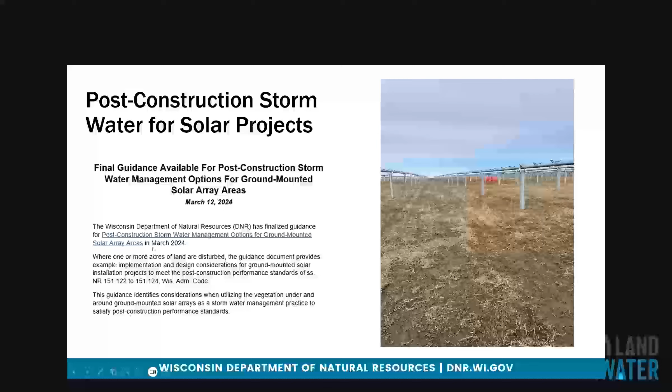Right now, the one that just fairly recently was put out for public comment and should be available shortly, Eric Rortfett is working on this one, is our post-construction modeling guidance.

This is the guidance that mostly is appropriate for people that are getting construction site stormwater permits, putting together stormwater plans. There are questions that come up that aren't answered by either the code or the permit or our technical standards, so that's why this guidance is really important. I use it quite a bit for plan review. Anybody who's submitting NOIs should keep up on this guidance because it guides how you, in particular, calculate things like TSS control and infiltration.

So there was an update that Eric did fairly recently. It covered some changes to WinSLAMM regarding biofiltration, also a section on filter strips. We don't have a tech standard for filter strips yet, but quite a few comments come up and people are trying to use it in WinSLAMM to take credit, but that raises some other questions without a tech standard. So there are some new elements regarding filter strips and a few other things.

So it was due for an update. It was probably about 4 years old. This is a guidance document that we do update quite frequently, so it should be available fairly soon when Eric gets through all the comments. So that's it for guidance documents. We have several tech standards that are in the works, and I think I talked about this last year too, suggesting that they would be available already by now, but we're getting closer.

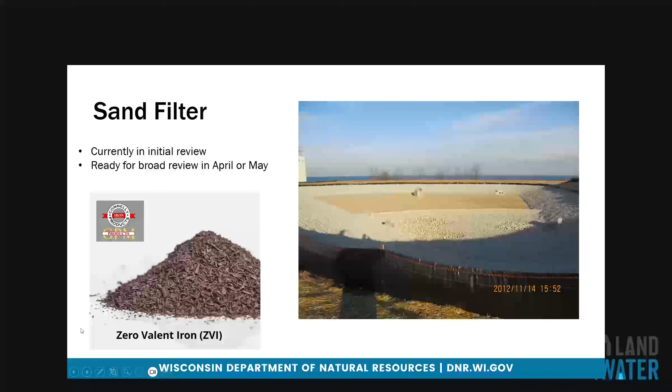It's added in at a pretty low percentage to the sand. It could actually be added in the traditional engineered soil mix also. It's usually 3 to 4% of the total mix. But it's showing a lot of promise, even with a mixture that has compost and sand, at controlling phosphorus. So we'll probably see a lot more of this. It could be used today in Wisconsin, but any other iron products would have to go through the same procedure for toxicity testing.

There's another tech standard, the enhanced phosphorus removal tech standard. I think Leif's involved in this one. It was actually a single tech standard. Apparently now it's been divided into two. And this is primarily for wet detention ponds and chemical addition to cause additional phosphorus removal.

So one's the flow weighted option. So this would be similar to application of a coagulant in water or wastewater treatment, where it would be added during a storm event, proportional to the flow. And then the other option is episodic. So this would be basically like dosing a pond when there isn't a storm event occurring. And so the tech standards are developing procedures for how these chemical additions should occur in those two applications.

So we'll see. This is probably more of an MS4 application, I'm thinking. Leif may have some more input on that, but that would be my thought. I can't imagine developers using basically a permanent chemical installation technique, but we'll see how that plays out. So that's where we're at for our technical standard updates.

Now I'm going to spend at least some time on some of the stuff we're working on in the MS4 permit world. So some really interesting stuff, and we'll see where it plays out. The first thing I want to talk about is something I've been involved with for the last year. This was a joint effort between DNR and MMSD to talk about urban soil health. So I think it's not a surprise that soils in urban areas are in pretty bad shape from either historic fill, compaction, poor vegetation quality.

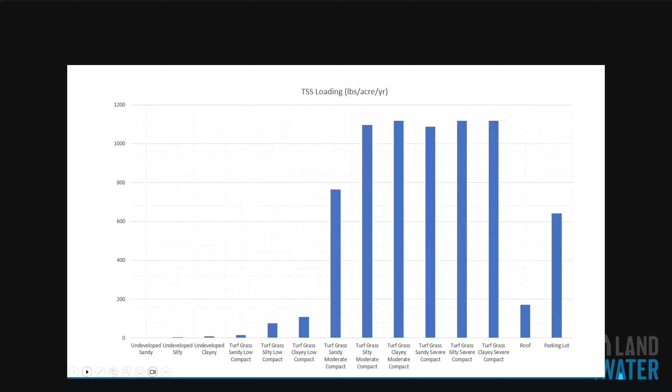This may not be the answer for everyone, but I think a lot of municipalities may have some pervious areas where some sort of practices could be implemented that could result in significant reductions in discharges. So that's the idea. And one of the concepts out there in the world is suburban subsoiling. We had an expert, Stu Schwartz from the University of Maryland, Baltimore County, who provided a lot of the technical assistance to this group on the techniques available. So suburban subsoiling is essentially applying 2 to 3 inches of compost to the surface and then deep tilling it to 20 to 24 inches, and then revegetating it, either with turf grass or with native vegetation.

And the interesting thing about working with Stu, he's very practical about this whole thing. He suggested this doesn't create a super soil. What it does is bring a soil back to its kind of optimum condition, prior to all the urbanization impacts we talked about. So this is one of the techniques that we talked about.

There's also some other techniques. This is just one of them. This would be more of something that you would possibly do on a residential site. It's essentially digging up the compacted soil and putting it back in a way that it's uncompacted. So if we have a future tech standard, it would lay out a number of different options.

There's different aeration techniques, in combination, let's say, with compost addition or sand, to try to bring that soil back in some way. So future tech standard, hopefully we're able to do that, and it would lay out some different options. And then also if we're able to monitor these practices, actually quantify their effectiveness, we could establish some kind of credit system, which I think would be of interest to MS4s.

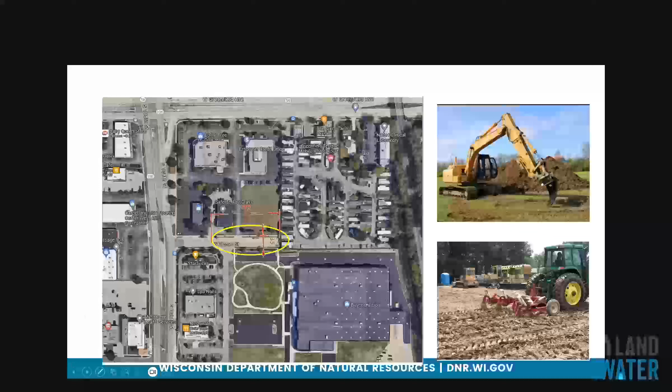Another project of interest to MS4s is one where we're lucky enough to get a student intern to help. We've been contemplating the issue of long-term maintenance agreements for private practices. This is part of the MS4 permit, especially if municipalities want to take credit for TMDL compliance using private practices. They need to have long-term maintenance authority and make sure these private practices are being maintained. And we just wanted to help in some way.

So what our intern is doing right now is getting a feel for what all the municipalities in Southeast Wisconsin are currently doing in this realm to manage, the most difficult thing in the world, especially ponds owned by homeowners associations. So we're doing a little background work, and we'll see what that tells us. We've also partnered with Sweetwater on this. First is just to establish what folks are doing, and then identify what the needs would be.

It's a difficult topic, from what are the best approaches legally, how do we help homeowner associations do this work, funding. It's a broad topic, and we've talked about it at this conference in the past too. So stay tuned on that. Ultimately we may develop some sort of guidance to help municipalities deal with this. But part of it is learning what everyone's doing and seeing how we can make improvements. We're going to need some help. We'd like to make some progress, hopefully, in this area.

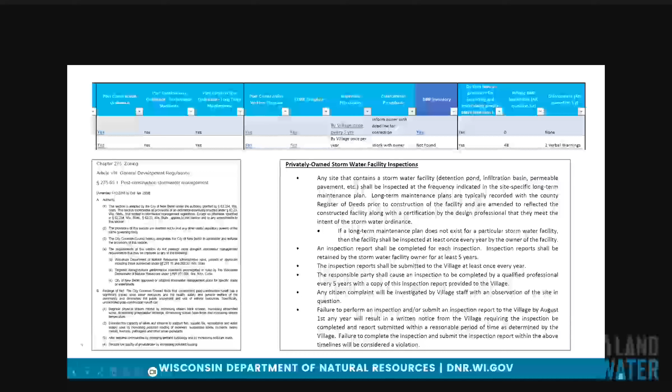Finally, okay, not finally, but another effort that you'll hear about: Lexi Pasante. I think some of you have heard from Lexi. She's one of our MS4 lead folks. She has started a project called the MS4 BMP menu. So what ultimately this is going to be is a DNR website application where we're going to provide examples for everyone of different practices that can be done to meet your permit, right?

So different programs and practices, all in one place on a special website. That's under development right now. Hopefully it should be available this year. But this is for the MS4s to have resources you can go to if you're struggling to, say, develop an illicit discharge program or something like that, right? Or how you regulate erosion control on construction sites.

So this is what we're doing right now. It'll be a website application. It'll have all kinds of resources, fact sheets, and other things. So it's a pretty significant effort, but having it done by the end of the year is what Lexi would like to see. So stay tuned on that. Should be a real great improvement for resources at least.

And then finally, just to give you a general idea of how MS4 TMDL compliance is going. I call it implementation trends. Most of the communities in the Milwaukee area that are under TMDLs are doing some activity in this realm, right? So I just want to list what we're seeing folks trying to do. I got a lot of this information from Lexi.

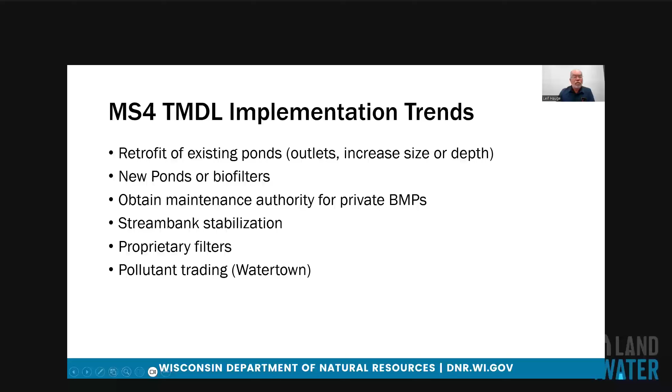Great, thanks. I'm not seeing any chat questions, but I wrote down some of my own that I'd like to share. All right. You're always good for those. For the solar projects, since the vegetation is essentially a BMP and it's presumably being required by whatever community to fulfill ordinance requirements, does that then entail a maintenance agreement?

Leif, I should know more about this, but I don't. Yeah, I mean, I think that would be logical, right? That if a BMP is suggested in a plan, it makes sense that there would have to be some kind of maintenance. So I'm going to lean towards yes, but I haven't looked at the tech standard closely enough to give you a definitive answer.

But it makes sense to me that any practice being used to meet permit requirements should have some sort of maintenance plan. And that would include any kind of vegetated area, because obviously, if for some reason it would start eroding or vegetation would die off, that would be an issue that would need to be corrected, right? So it makes sense to me that it would have to be incorporated into a maintenance plan.

A couple questions from the audience here. For urban soil health, any feel for soils best to try? That is a great question because again, we lean heavily on Stu Schwartz for this information. He did provide a table that showed that yes, there are soil conditions that are, I guess, more effective than others, where you would get a better result.

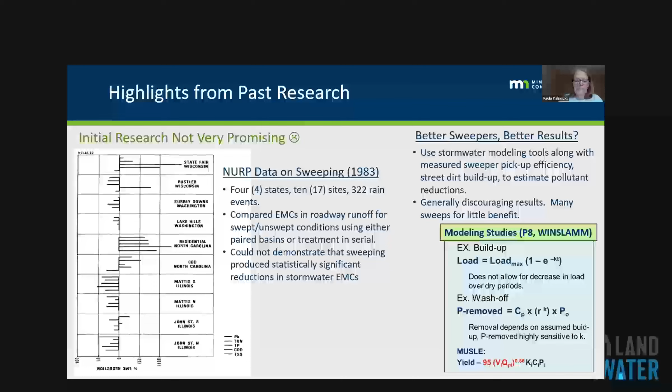And unfortunately, these studies still didn't have a lot of promise. It just seems to take a lot of sweeping to get much benefit. But some other studies showed some promise here for street sweeping. There's one from 1999, Waschbusch, Selbig, and Bannerman from Wisconsin, looking at runoff from different source areas in residential neighborhoods. And they found that there was a correlation between the overstreet tree canopy cover density and the concentration of phosphorus.

So this was not a street sweeping study per se, but they did also look at the sediment on the street and found that where you have higher tree canopy density, you also have more nutrients in the sediments that collect on the street. And a couple of these researchers then went further in 2007 in Madison, and did a very meticulous street sweeping study where they used paired catchments, or actually serial treatment.

So they would have a year where they weren't sweeping, and it was a calibration period. And then they would sweep and see whether there was a reduction in the stormwater EMCs that were measured downstream. Unfortunately, they also could not find a statistically significant reduction in stormwater EMCs.

But again, this was a very meticulous study, and because its methods were so well laid out, it was easier to identify what they might be overlooking. And William Selbig, the first researcher listed here, has continued to work on these problems, and the biases in traditional stormwater sampling methods.

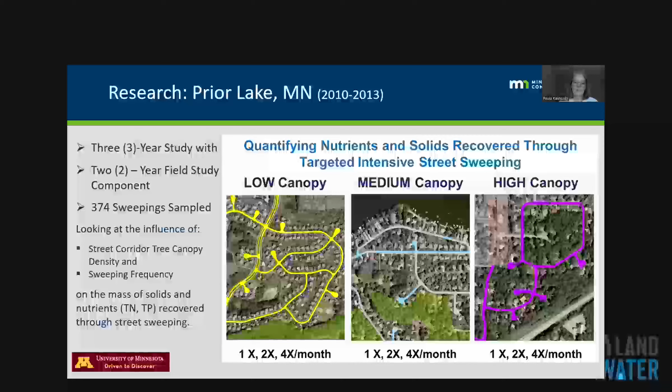And then the sweeping frequency. So for each of these canopy cover types, we had a route that was swept once per month, one that was swept every other week, and one that was swept weekly. And then we sampled the sweeper waste, and we got a representative sample from each of those sweepings, which totaled 374, and tested that material for its nutrient content and its total dry solids, not really any of the metals or toxins, but really just focusing on this nutrient piece.

And to do that, they had a unique lab method, a fractionation scheme that's a little different than what you might think of when you think of sediment fractionation. We usually think about that NURP particle size distribution, or just a particle size distribution into clay, silt, sand, fine sand, coarse sand. But we had to use a density separation to separate this organic matter that would float.

So the material was sieved, and then what remained on the 2 mm sieve was washed and then separated. We had to sample that wash water to account for nutrients that had leached. And what we called fines in this study was anything that was less than 2 mm. So that's kind of a different terminology than what we might be used to associating with the word fines.

So that was a very quick look at the setup, but we're going to go through a really quick look at some of the findings. So some of the key findings here: the things that were measured were the total solids that were collected, and then those nutrient components.

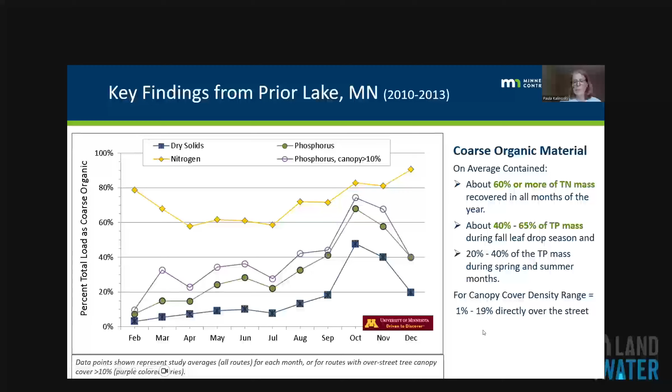They were able to compost anything with a lot of leaves, and they reused a fair amount of their material for fill. They were developing at the time. So that's a cost that sometimes is much bigger for some of the cities. But the big finding was it can be very cost effective, especially that high canopy at particular times of the year.

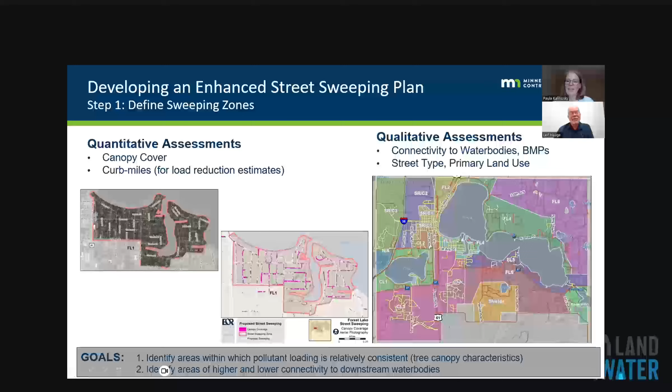So we had to look at the canopy density over the streets and the drainage characteristics, where they have BMPs, and kind of develop these zones where there's those factors that I talked about earlier: high connectivity and high street canopy.

And once we had identified these zones that had that relative homogeneity, we used my calculator to estimate, okay, how much can we recover from the street by sweeping just spring and fall, by adding another sweep, by sweeping monthly, etc. And then we thought, well, what you recover from the street isn't the same as a load reduction to a water body. So this is a big simplification probably, but still maybe as best you can do.

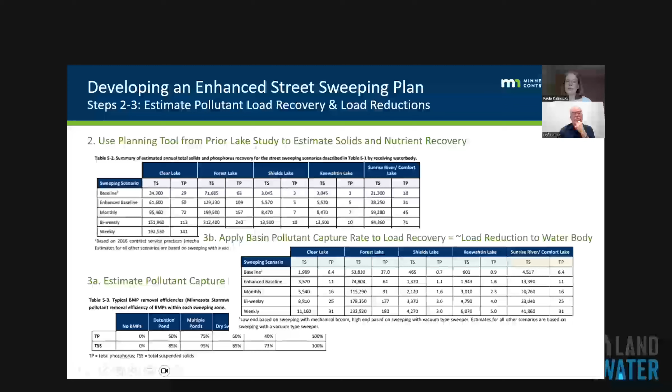We estimated what percent of that material the BMPs within each basin would capture, what's the capture efficiency of those BMPs, and then we applied that to these load recoveries to get an estimation of the load reduction to water bodies.

And we did an estimate of the costs for developing an in-house program following what the engineer had done in Prior Lake and talking to the city engineer there, and found that this city could actually save money by developing an in-house program. They had previously been using a contract service. Anyway, I'll just go on.

But all of this work prompted the MPCA, where I work now, to develop a street sweeping credit for MS4s. There's a calculator that they've developed so that MS4s can determine, based on the amount of sweeping that they've done and the material weights they have to get, what credit they can get towards their waste load allocations.

This crediting calculator was produced using some additional sweeping data from five other communities in the metropolitan area, and an additional 175 sweepings, including some from the Forest Lake area, because they caught wind of this effort and said, hey, we're implementing our street sweeping plan, and we could send you some samples to use to calibrate your tool. And that was great for us because we could check our assumptions.

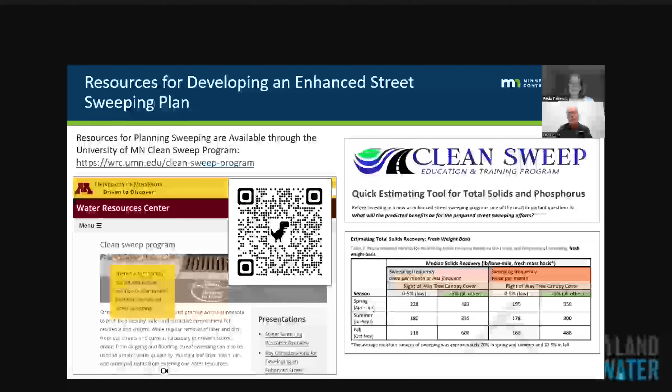The University of Minnesota has built on this research to develop a Clean Sweep program. So they have tools that help you to estimate your recovery based on canopy and these other things that we've discussed. You'll find another QR code, including ways to estimate tree canopy too. There are tools for that.

So there's help out there, and I'll just say in Wisconsin, Bill Selbig has continued to do a lot of research in this area, and it's really interesting stuff. Another QR code, you should read his articles.

And I'm also an alum of the University of Wisconsin-Madison, so can't overlook that.

All right, I'm sure I'm over, but I'll take questions. No, you're doing great, actually. What's that?

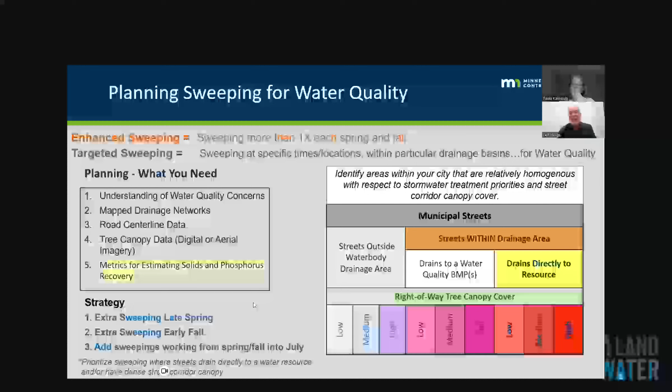That's very interesting. In retrospect, do you have any idea why those earlier studies were statistically inconclusive based on your experience with this study and application? Yeah, well, a big part of it, if you look at Bill's work on the integrated sampling depth, a lot of it has to do with that.

There's two things. If you're just looking at one point within the storm sewer, if you're pulling water from there, you're going to miss some material. You're going to miss heavy material that settles out before it reaches the sampling intake, and you're also going to miss anything that floats or is just too large to get in there.

And then the other thing, so that's one factor, but the other thing is that oftentimes this organic material was just kind of overlooked, separated out, and not really analyzed. And there was a focus more on toxins, I think, in those earlier studies. And that's not surprising. That's closer to the Clean Water Act and rivers being on fire and everything.

There was a focus on nutrients and eutrophication, but I think that's a greater focus for us now because we've eliminated a number of things through our NPDES permit. And we really can hone in on what we haven't been able to solve so far. Yeah. Here's a question from the audience.

Did you do any correlation to what WinSLAMM modeling predicted versus the spreadsheet calculations you prepared? I haven't done that, but here's the thing with P8 and WinSLAMM. I don't know if WinSLAMM has since added any functionality, but WinSLAMM I think was calibrated from that 2007 study.

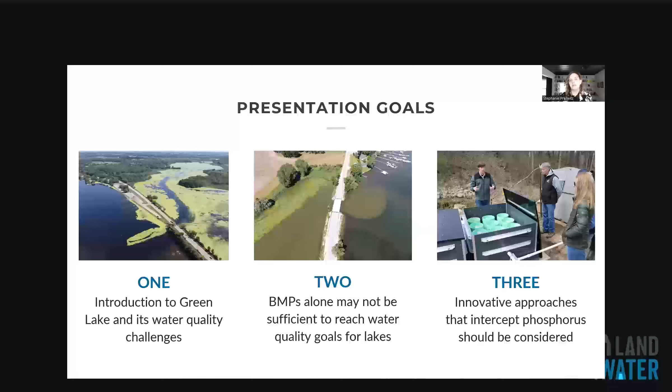So my presentation, I'll touch on three topics. One is I'm going to be talking a lot about Green Lake, so I'll talk to you about the lake itself, its water quality challenges. I want to talk about how when it comes to the really substantial phosphorus reductions that many of us who are lake managers are facing, best management practices alone may not be sufficient. And I want to tell you a little bit about some of the innovative approaches that we're testing and looking into. So welcome to Green Lake.

Green Lake's claim to fame is that it's the deepest natural inland lake in Wisconsin. Its depth is 236 feet deep, an average depth of 100 feet. And because of that great depth, Green Lake stratifies into a two-story fishery. So warm water on top, cold water on the bottom. And that great depth is a very strict water quality criteria, so 15 micrograms per liter. The lake is 7,660 acres.

The latest calculation of the retention time is that it's about 15 years. I think it's so interesting to compare that to Lake Winnebago, for example. I believe I read somewhere that its retention time is closer to 6 months. So really lots of water flowing in at a slow rate leads to a long retention time. This lake is a glacial lake, so formed during the last ice age. Green Lake's watershed is within the Upper Fox Wolf watershed. And so for that reason, we are part of the Upper Fox Wolf TMDL. But I'm going to talk in a little bit about how our few point sources and other challenges affect the way that we manage the system.

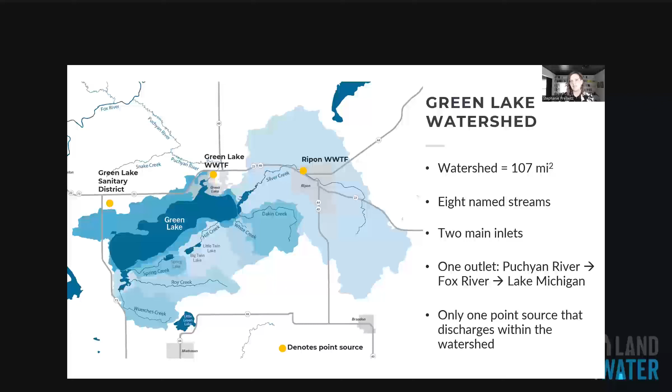I think very interestingly, we only have one point source that discharges within our watershed. That's the Ripon Wastewater Treatment Facility. And generally, that treatment facility has been meeting its water quality standards. I think in about 2014, they were even awarded as one of the best wastewater treatment facilities in the state. The Green Lake wastewater treatment facility is located and discharges outside of our watershed, and the sanitary district, which loops the majority of the lake, discharges outside of our watershed. So both of those are kind of doing us a water quality service. But when it comes to point sources versus non-point sources, there's really one that we're working with, and that one is doing a pretty good job.

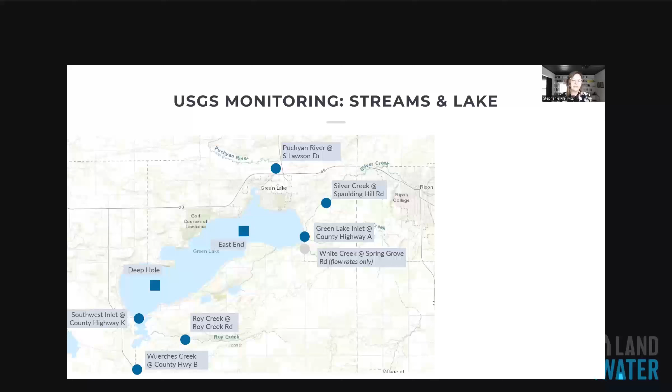When we care about the lake, of course, we care about the watershed, and our watershed happens to be largely agricultural, about 65% agriculture, and that affects the way that we manage this lake and watershed system. We also invest a lot in high quality data. You can see here, all of the blue dots are U.S. Geological Survey gauges. We also work with the USGS to measure within the lake itself on a monthly or bi-monthly basis. And we have such robust data for this lake. I think it's so interesting that we have data going back to 1905. Birge and Juday, who are the founders of limnology, made the trek from Madison to Green Lake, and we have actual data in our long-term data set from them.

A history of DNR citizen science data. In 1981, the U.S. Geological Survey Stream Monitoring Program begins and then expands to the lake in 2004. Now, I don't want to say that the Green Lake Association is responsible for this, because only very recently we made investments. We're paying now $90,000 a year for this data using donor funds. But it really is possible because of a partnership with the U.S. Geological Survey as well as the Green Lake Sanitary District. So I want to make sure that those partners get credit because it's due.

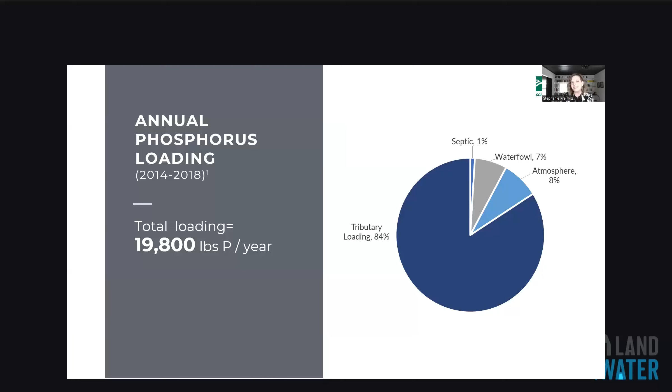From that robust data, I'm going to talk a little bit about a diagnostic and feasibility study that the U.S. Geological Survey did in partnership with the Green Lake Association. But we found that on average, Green Lake is receiving about 20,000 pounds of phosphorus a year. Now, the majority of that is controllable loading, external loading.

So what is that phosphorus doing to our lake? Well, it's really causing two primary water quality challenges, which we now know are related. One is that we have high phosphorus at the surface of the lake. You may recall that our water quality criteria is 15 micrograms per liter. Our 5-year average is 17.7. Now, that may not sound like a big deal. And if anybody is on Lake Winnebago, for example, you may be wondering what all the complaining is about.

But some of the calculations are that pre-development phosphorus concentrations for Green Lake were along the lines of 11 micrograms per liter. So, just these little shifts in phosphorus are making big differences for our lake. And that's a 5-year average, which happens to fall in a pretty dry period of time. So I suspect that these drought conditions are doing us a favor from a runoff perspective.

The second water quality problem that we have is related to a metalimnetic oxygen minimum, a mid-lake kind of dead zone right at the thermocline. And it was for this reason that in 2014, the Wisconsin DNR listed Green Lake as impaired. The water quality criteria here is 5 milligrams per liter, and it's been generally worsening since 1905, going back to that data set that I mentioned from Birge and Juday.

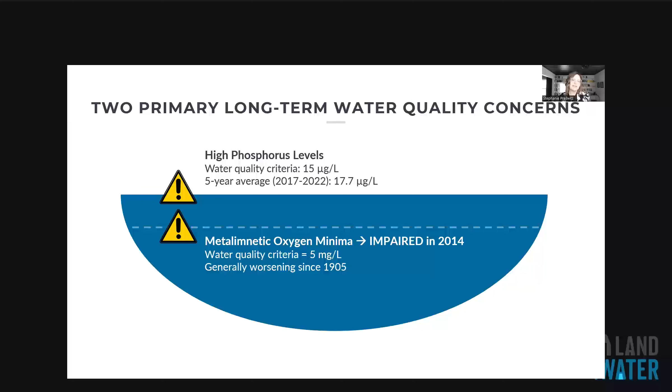So 2014 comes, we're listed as impaired. Our impairment listing, the pollutant is phosphorus, but we didn't actually know that. And even if we suspected that it was phosphorus, we didn't have any sense of what was the scale of phosphorus reductions needed to remove the lake's impairment listing. So in, I believe, about 2016, we started a diagnostic and feasibility study with the U.S. Geological Survey and Michigan Tech.

What I like about this study is that, so this was done primarily by Dale Robertson and Corey McDonald. They worked together, but they also kind of worked in silos in that these were two separate approaches that came at the same problem. The U.S. Geological Survey relied heavily on watershed modeling. Michigan Tech collected more data and put together a lot of kind of ecosystem models.

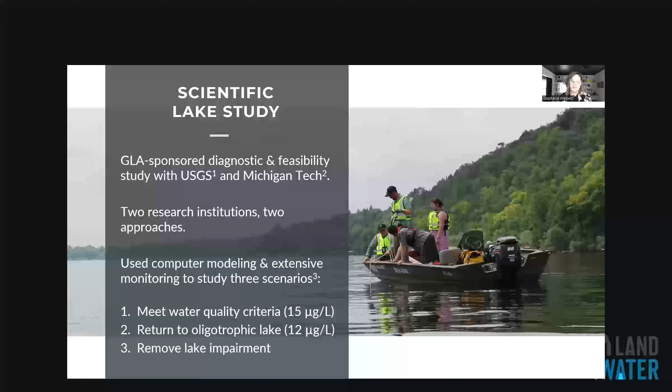And we looked at three scenarios. First, is phosphorus the problem? And the answer primarily is yes. The scenarios were, what do we need to hit to reach our water quality criteria, to become oligotrophic again, or to remove the lake impairment? And I'm not going to go into the details of that, but I have citations throughout my presentation. So if you're interested, you can certainly look into that more.

But as one example, the diagnostic and feasibility study found we needed a 60% reduction to remove the lake from the impaired waters list. Now, if you look at our lake management plan at the time, it said we needed a 10% reduction, which was based on absolutely nothing. No water quality modeling or anything like that. So for us, this was a real wake-up call that required our organization to totally shift.

And we realized that our challenge was every pound of phosphorus making its way to the lake, we had to come up with ways to cut it in half. And that was much different than a 10% reduction. And so we completely rescaled our organization. And since that time, because we've used data and science, and I would say good storytelling and communication, we've been able to scale up our organization to try to tackle this head on.

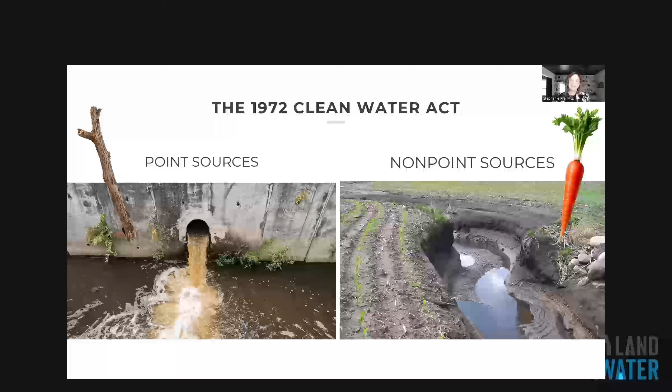So when you're looking at a 60% reduction or any type of phosphorus reduction, what do you have? Of course, you have point sources and non-point sources. And we often talk about these in terms of sticks and carrots. But you'll recall that we have one point source in our watershed. That's generally meeting its water quality criteria. And so for watersheds like ours that are primarily agricultural and not a lot of industry around, we really are working under a voluntary framework to hit these ambitious phosphorus reductions.

And so we are doing all of the things that you want to do when it comes to those types of non-point source approaches. And certainly we can scale up, but we have a 9 key elements plan, a watershed management plan that opens the door to federal funding.

The Green Lake Association used donor funds and purchased a no-till drill with a prairie seed attachment to allow farmers to interseed cover crops. We sponsor 2 farmers as part of the Upper Fox-Wolf Demo Farm Network. We host field days. We sponsor stream restoration. We remove carp from the lake with the Green Lake Sanitary District. We help underwrite the cost of best management practices.

And in just one example, in last year alone, our Green Lake management planning partners received over $1 million in best management practices. So hundreds of best management practices have gone in our 107 square mile watershed. But these are all carrots. These are all voluntary. And certainly we try to sweeten the approach. We try to make these free. We underwrite the cost of them. The sanitary district takes on maintenance, but this is voluntary.

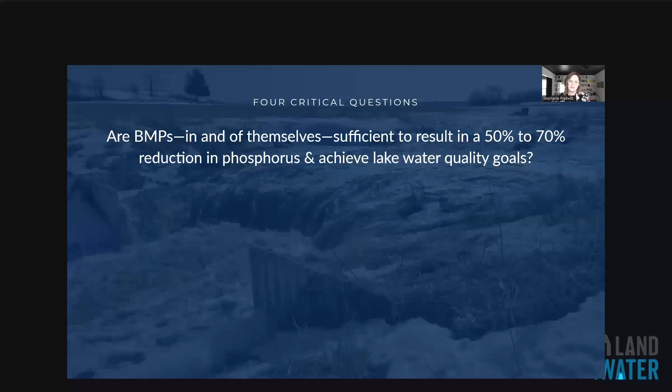So we started to ask ourselves a few questions. Are we really going to be able to install enough best management practices, often voluntarily, to hit that 50 to 70% phosphorus reduction? How does climate change affect BMP effectiveness? I know that Steve Carpenter and others in Madison talk about the treadmill effect, where you're having to do more and more practices just to stay in the same place, much less to try to make a 50 to 70% reduction in phosphorus.

Also for us, Green Lake's long retention time is both a blessing and a curse. It's a blessing because it shields us from some of these water quality degradation pressures, but it also means that we're working generations ahead when we're seeing warning signs and trying to respond to them. That change doesn't happen overnight.

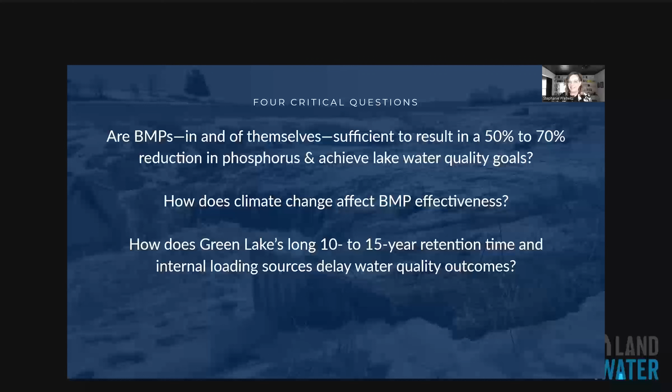And I think very tellingly, and this is a genuine question, so I want to hear from you and I want to learn from you. Can we think of an example where we have installed, in the state of Wisconsin, in the region, the nation, enough best management practices that we have measurably improved a lake's water quality?

Now, certainly these BMPs are fulfilling an important role when it comes to edge of field treatment, when it comes to keeping sediment on a farm field. But these best management practices were often designed during the Dust Bowl to prevent soil from blowing all the way to the doors of the White House. Where have we been successful in using them to clean up our lakes?

I've been able to find one example in Wisconsin, and that is Deer Lake in Polk County. This is an 812-acre lake, a 5,700-acre watershed. And after spending $1.3 million for land acquisition and best management practices, with a very engaged land trust there, they were able to reduce phosphorus by 53%. But I really am looking for success stories everywhere.

So if we go to the other places that are wrestling with this, Chesapeake Bay did a comprehensive assessment of decades of work, and they're saying, man, this is tough news. Existing programs are unlikely to produce the scale of reductions needed. Dick Osgood wrote a paper, and he found that this strategy of using best management practices has resulted in a lack of progress in lake management.

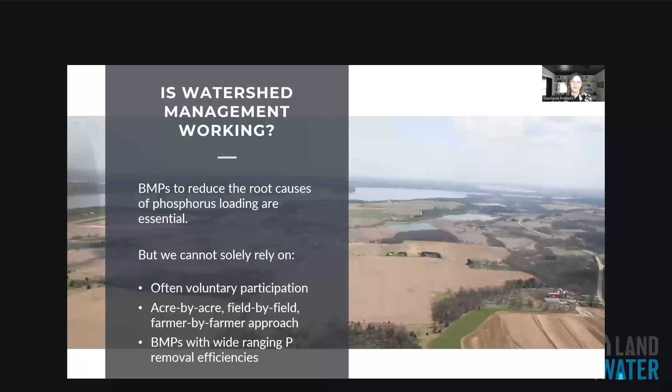But when we're trying to improve water quality, this voluntary approach, acre by acre, farmer by farmer, field by field, is that really going to get us to where we need to go to save our lakes? And so I would offer that this model of voluntary adoption of these tools is not going to yield a 50 to 70% reduction in phosphorus or whatever that may be. So we have to broaden our approach.

In Green Lake, we believe that new innovative tools that have had success elsewhere, but aren't widely applied in the Midwest, need to be looked at more closely, intercepting phosphorus before it reaches the lake. So I'm going to dive into why I think that the Green Lake watershed can serve as a model for this. We're actively working on this now, and we're anxious to share what we're learning so others can learn from us as well, but we also want to know what others are working on in this field so we can learn from you.

So from that diagnostic and feasibility study that I talked about, we started to observe that 80% of our phosphorus of this 107 square mile watershed really flows through two primary points of entry into the lake. 80% of our phosphorus through two inlets. And so can we use those phosphorus pinch points and other pinch points throughout our watershed as places to potentially intercept phosphorus? These are the systems themselves.

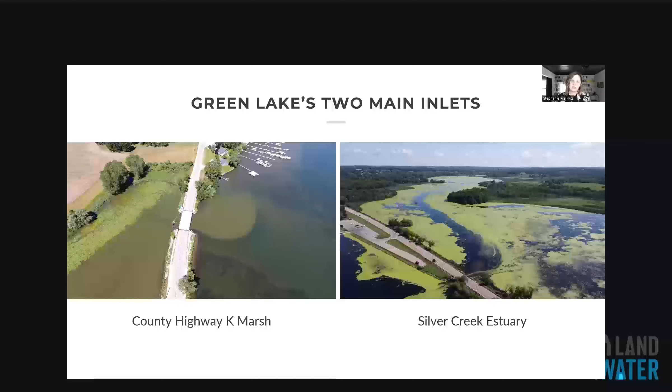And the County Highway K marsh, certainly you can see that there is likely an internal loading problem, a degraded marsh happening. So we're looking at phosphorus interception. We're considering phosphorus interception at two scales. So we take that southwest inlet, at the main point itself, but also at smaller sections, potentially on agricultural retention ponds. I'm going to talk about both of those now.

If we think about kind of the larger scale, where are global success stories of this? Certainly, there are, in terms of sediment inactivation, using alum or other products to cap internal loading in our inlets is something that needs further study. Using the streams themselves as points to intercept phosphorus through some type of alum injection system.

Now, obviously, these are different scales. They come with various risks and operation and maintenance, but we want to know what's on the table before we kind of write something off. Is it possible? Certainly, we don't think that we have all the answers. And so last year, we partnered with the Water Council and we conducted a request for information process where they used their global network to reach out for potential solutions.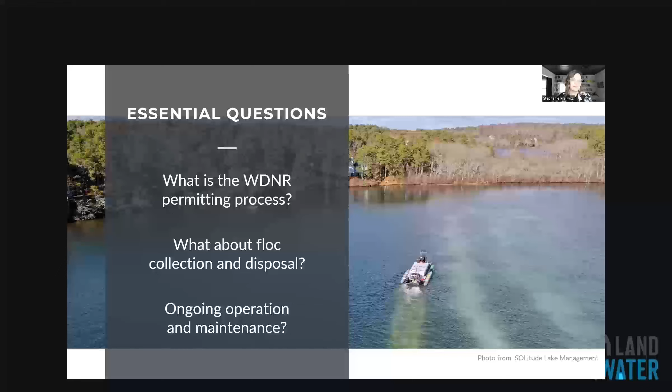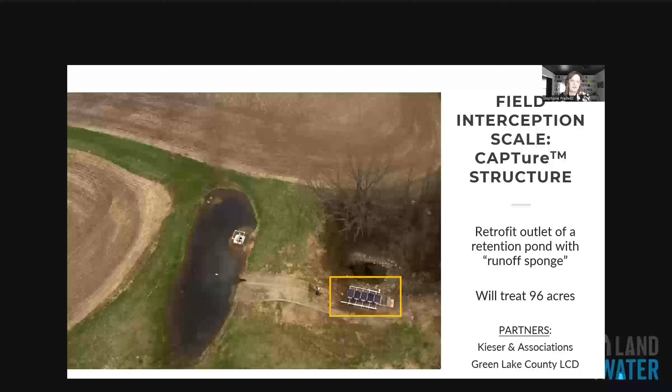So if we zoom in to that capture structure, if you were to open one of those boxes, you can see the inside here of this system. So after that runoff is held through an agri-drain system for 24 hours, we send it through this capture box. It's full of alcan media, which has been shown to have over 50% soluble phosphorus removal.

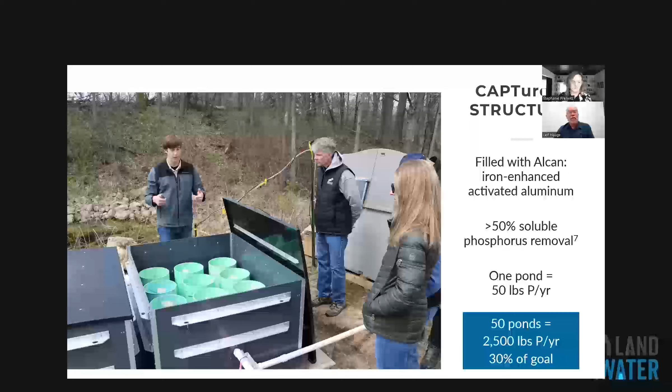So this one pond, we estimate, can treat about 50 pounds a year. May not seem like a lot, but when you think about that we have 50 ponds in our watershed, you can start to see that this could be a possible approach. Is this a long-term solution? Absolutely not. Is this a Band-Aid? You betcha. But isn't it better to be proactive when it comes to managing our lakes than waiting until we hit this ecological tipping point? And now we're trying to reverse the clock when it's much more economically challenging.

So some of the key takeaways then from this. Best management practices alone, we're not going to BMP our way to a cleaner lake. So I think it's time that we start to think about broadening our approach. We believe that phosphorus interception may play a role, and we're really trying to actively serve as a model for identifying some of these strategies and certainly trying to test them in the Green Lake watershed. We think this is a very doable scale. You know, 107 square miles is enough to be, I think, a scalable system. So we can take what we've learned and apply it broadly elsewhere.

So with that, I'm happy to answer questions that anyone may have. Sure.

Have you been looking at legacy streambed sediment phosphorus and perhaps like Dane County's Suck the Muck program as a possible source and solution? We have. So one of the projects that I didn't mention is that, especially on Roy and Wirchus Creek, both of those systems were found in the entire, I think, 5,900 square mile TMDL area to be some of the top 10 worst phosphorus concentration hotspots. So we targeted that sub-watershed and did a stream inventory. So walking, using drone footage, every mile of stream, identifying erosion hotspots.

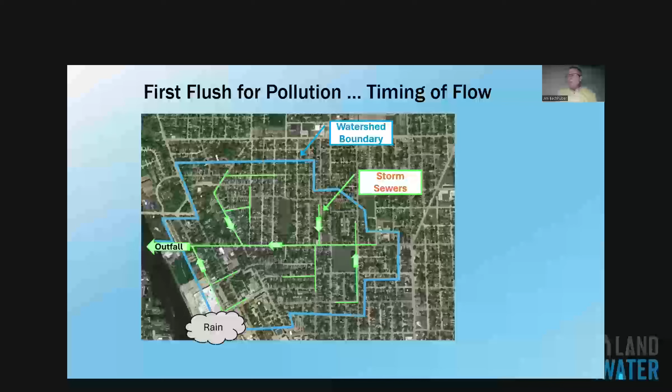All this affects, of course, the timing of our discharge at a measurement point, let's say an outfall here at a storm sewer outfall. So what happens when you measure that outfall is you end up sometimes with a hydrograph that might look like this. This is an actual hydrograph measured by USGS quite a while ago, but I think the principles still apply.

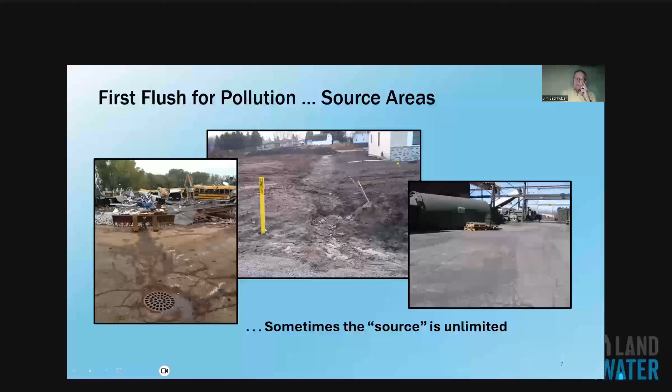And this becomes really important when we're trying to monitor or model discrete urbanized areas. Let me give you an example of one site that we did a number of years ago. Very small site. It's simply a single parking lot, real urban area in Madison. We wanted to monitor this because we wanted to sample this underground treatment device as a USGS operation again. They were going to sample the raw water coming off the watershed through a storm sewer system before and after going through this treatment device.

And when they set these up, they put in a rain gauge to measure the rainfall, and you can then calculate the volume of water coming off this watershed in order to calculate things like event mean concentration or pollutant loads on a per acre basis. So the watershed here is pretty simple. It's all a parking lot. It's all paved. It's got one storm sewer inlet here, treatment device, and then an outfall that goes to a downstream storm sewer system.

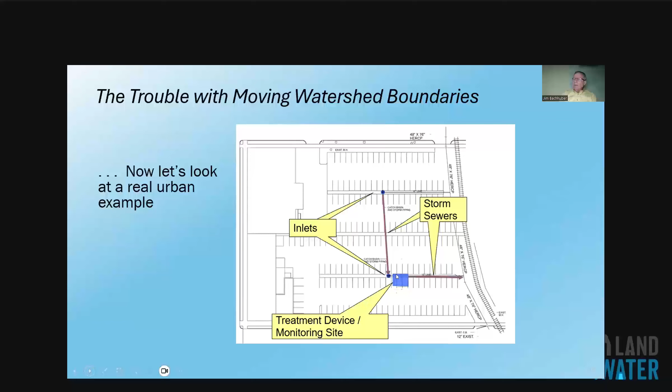When we first started looking at this site, we wanted to know the watershed to the treatment device. So we started to look at the site plan that was developed when the parking lot was designed and built. Based on the site plan drawings, we came up with a watershed boundary of about 1.4 acres in area. And after some monitoring of flow and discharge at this point, you get some numbers sometimes that say it seems like it rained a lot more than what was coming out the other end, or a lot less. What's going on here? Is our watershed boundary an accurate depiction of where the water's coming from to start with?

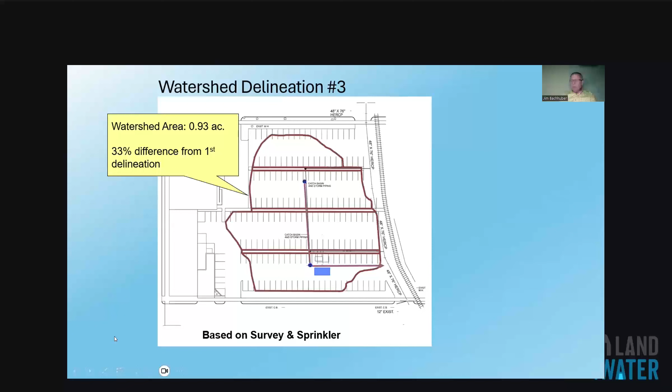The last thing I want to talk about, I'm going to put us back on schedule here for sure, because I knew we didn't have a full 25-minute talk here.

I want to talk about street sweeping for a little bit. And this has been going on for a long time. Paula gave a good summary of a lot of the history and background of monitoring and trying to get at the idea of what our street sweepers are doing and how much pollution control they are achieving. Paula was focused, rightfully so, on the phosphorus issue. I'm going to focus more on the TSS issue, total suspended solids, because for better or worse, that's what in Wisconsin our MS4 permits and TMDLs are based on.

And that's been kind of a bone of contention for some people, that we talk about TSS as the goal for a surrogate pollutant category to meet for our regulatory purposes. And I'll get into that in a second and explain why that's such an issue, especially when it comes to regulatory compliance.

So what do our street sweepers pick up? What's in the hopper? Well, the garbage and junk you see along a curb is a mixture of stuff, right? You've got leaves and litter and pizza boxes and dead animals and mufflers and bricks and dirt, street dirt or sediment or particles. When you dump that out, you see a good sized pile of trash. It's always good to get that stuff off the street for a lot of reasons, including water quality.

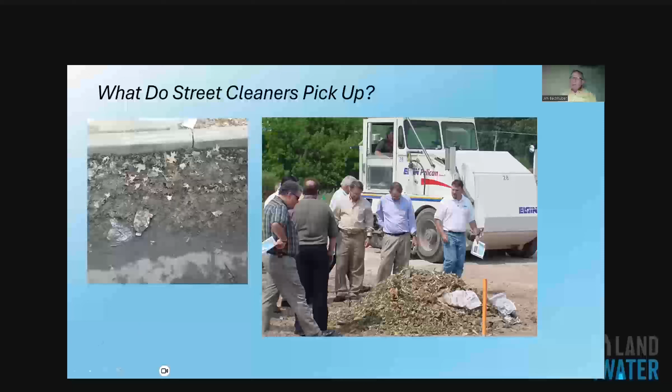But of course, a lot of street sweeping is done for aesthetic purposes, to keep the streets looking better, and the public wants that. When you look at what's in these piles, and Paula got into this a little bit, I'll just get into it a little bit also. This is based on some data from City of Madison quite a while ago, but again, these are brush mechanical sweepers. So I know that some of this may change a little bit if we had data with the vacuum type sweepers, but for now, we're just going to talk about the mechanical broom sweepers.

The actual particle sizes that are in the hopper look like something around this distribution. A lot of the particles are above 500, above 200, 70% above 200 microns, which is a good sized sand particle, kind of the breaking point. So that's what the sweeper is picking up, a lot of this debris and a lot of these gross solids, we call it. And an awful lot of it is in the sand and gravel category as far as particle sizes go. 80% of the material in the hopper is in this range of sand and gravel.

Now, when you talk about TSS, total suspended solids, which is what the regulations are based on, the NURP particle size distribution, we've all talked about that. You get a different picture of the particle sizes in the stormwater, in the outfall itself. 80 to 90% of TSS found in stormwater is finer than the sand particle breakoff. It's the silt and clay sized particles.

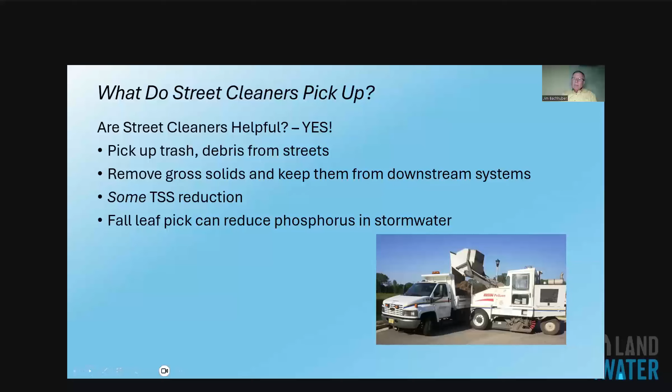So, are street sweepers helpful? Yes, of course they are. Picking up the trash, debris from streets, getting rid of gross solids, keeping them from downstream systems, and some TSS reduction is certainly achieved with the street cleaners, not perhaps what we were hopeful of in the past. And then, as I mentioned, phosphorus removal in stormwater through leaf pickup, fall leaf pickup especially, is certainly a priority and a critical practice to use in our tool bag.

So first flush, sometimes, not always, especially in urban systems. There's a whole lot of factors that go into that, and this is important for sampling purposes. Watershed boundaries, I think, can move around depending on rainfall distribution, intensities, and the watershed conditions themselves. And what's in the hopper does not always equal TSS. It's a good practice, but there's a lot of other stuff in there that is not part of the TSS spectrum. I think that's all I had.

Let's see here. Yeah. So I know I'm very early. I'm sure you're all sad about that, but if there's any discussion or questions or comments, I'm certainly open to those.

Here's some audience questions, Jim. One is Minnesota considers snowmelt, I think, to be their largest TP load. Are there any Wisconsin studies on TP load and snowmelt? I am not aware of, I mean, we certainly have had sampling done, and Bill Selbig would be the guy to tap into.

I've not seen studies that, at least in Wisconsin, separate out the snowmelt from the rest of the year's loading. And as we all know, in Wisconsin, the WinSLAMM file, all these target numbers we're talking about, the rainfall files that DNR issues do not include the winter period. It's basically a 9-month rainfall. And because of the problems with trying to model and predict loadings from snowmelt, I think that's a huge can of worms.

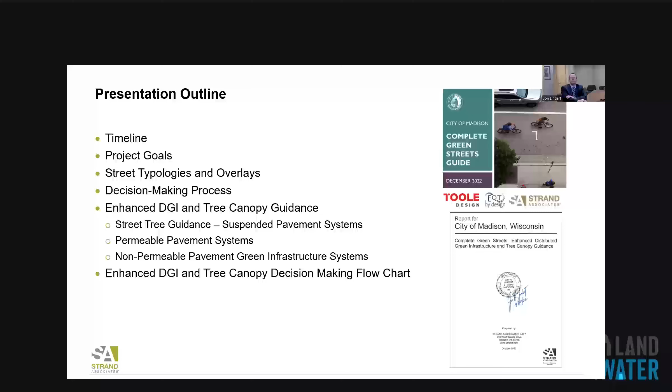EQT by Design did public engagement, and we did this report on the DGI and tree canopy. So to start out on timeline, going back to 2019, on the bottom left, City of Madison had a number of reports that they wanted to pull into the work that we did, including an urban forestry task force report, a SLAMM analysis, and green infrastructure for purposes of flood control study, noting that Madison had a lot of flooding back in 2018 or in this era, that they wanted to see if GI could have a real role in that or not. At the same time, EPA came out with a Green Streets Handbook in 2021 that we reference in our report, has some good information.

And then Birchline Planning was working with the city to do a DGI codes project, or distributed green infrastructure codes project, to look at ways in which codes could help with getting distributed green infrastructure into city projects, which led to our report as a complement to Toole's larger report on complete green streets.

So some of the project goals here, complete green streets overall. The city wanted a consistent process for planning, designing, building, and operating streets in a way that better reflects the community values, increases safety and equity. They wanted to ensure that the green infrastructure needs of a resilient city were met. And one of the big things was they wanted to guard against starting from scratch on each road project that the city gets into because of all these multiple competing demands for right of way in the city. They wanted a guide in terms of how to get around that. And you can see some of the values on the right for a holistic process that came out of this.

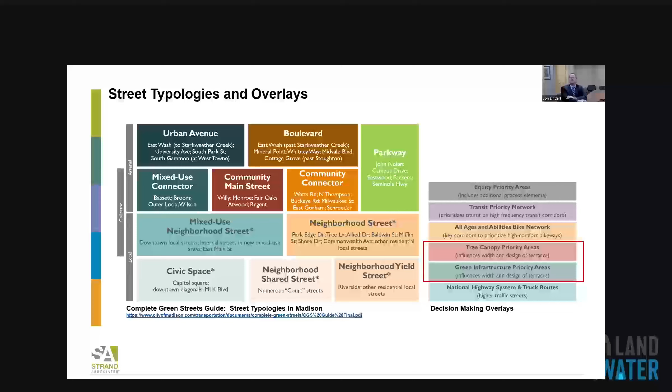From a street typologies standpoint and overlays, this is one of the big outcomes of the Toole portion of the project, where they wanted to look at your collector, local, and arterial streets, and then define those into boulevards, community, main street, neighborhood, shared street, or typologies, as it's known in the traffic world. And then on the right are the different overlays that help with decision-making. And of the ones listed there, we're in the tree canopy and green infrastructure side of things, and we'll delve into that in a little bit.

This is more of, again, a Toole deliverable here. And this kind of talks about, hey, we start a street project, number one, what do you do? Look at all these overlays and street types and look at this guide. And again, that red box there is the tree canopy green infrastructure, where we contributed information, but really the idea is to then look at all these competing interests, allocate space for things, and then get into design in a more streamlined process than they had before.

Street tree guidance. Okay, so we're going to talk about suspended pavement systems and how that can help with this. So we're going to talk about some tree canopy criteria that the city is trying to meet, suspended pavement system description, and 3 different types of that, and then a side-by-side cost comparison was one of the things that the city wanted to look at to help them guide the different systems they might use.

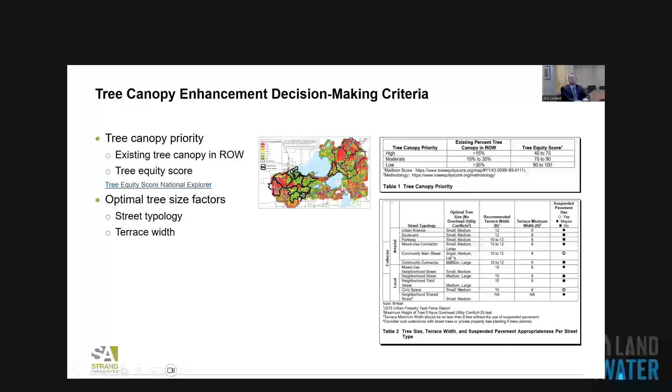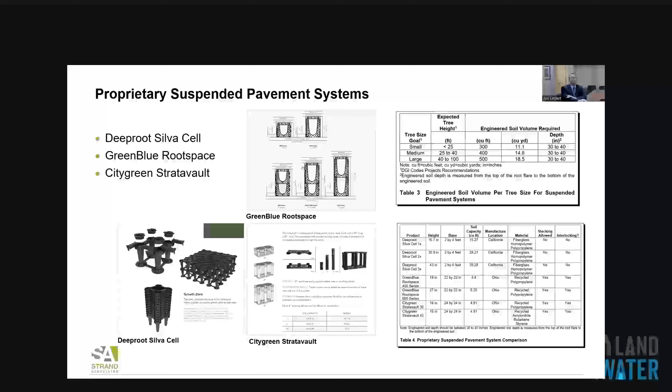A non-proprietary suspended pavement system, this is that State Street example. Back in, I want to say it was 2008, the city did put in a system that's shown here in the cross section that had kind of a pillar in between the root balls, the trees, and then you pour a slab out to that pier that kind of sits in the middle. And the city, while it works, there were some drawbacks to it. And so they ended up starting to go to these proprietary systems, which they then found were super expensive.

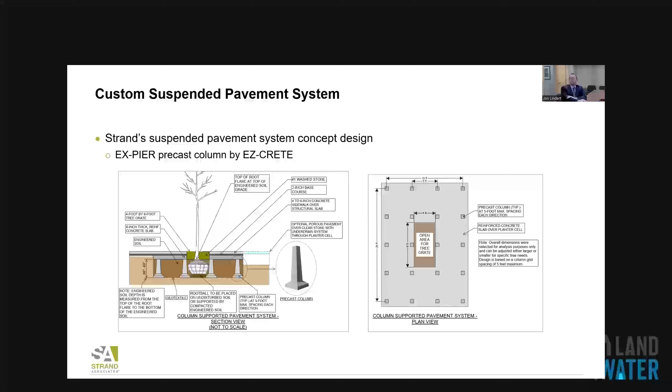And then they wanted us to come up with a custom suspended pavement system design, which is kind of a prototype or a concept design that we show here. If you look at the bottom left graphic there, that's a section view, and it's based on use of a more readily available concrete column, in this case, EX-PIER precast column by EZ-CRETE, where you would put those in instead of these plastic HDPE units, and then you'd pour your slab on top of that and have the appropriate sizing. All supported by structural calcs from our structural engineers to make sure it would work.

The State Street cardboard void form, as they called it, was around $24. And then you can see the proprietary being much higher than that, with Deeproot and GreenBlue having bid tabs from city projects, and the StrataVault was more based on information from the manufacturer because the city hadn't done their own project with that.

The other thing we looked at was permeable pavement and how that can be brought into any cross section in these different typologies. So we'll talk a little bit about it. Permeable pavement description, some of those types that are out there, system comparison, and some design considerations that the city wanted us to look at. One of the main ones being structural considerations, that the fire department had some question on use in fire lanes and other things where they have to operate their equipment.

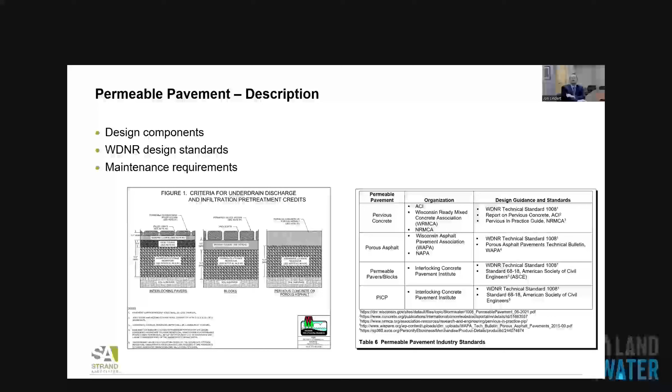So I think a lot of you know or have used permeable pavement. There's a number of organizations that support these different uses, including design guidance and standards, as you can see on the bottom right. DNR has a lot of guidance that we all probably use. That's all referenced in this document to kind of get it in one place. And just a little bit of a comparison on some of these for those that maybe don't know a ton about it. And again, it's in this guidance document to let any user really understand this information.

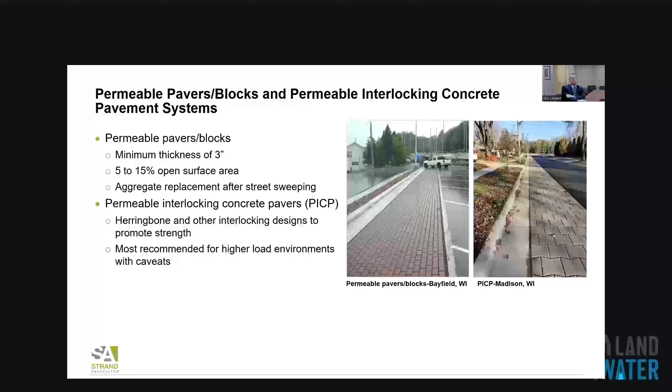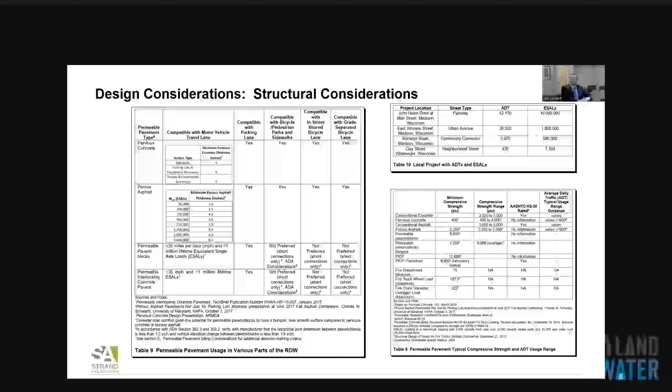I did find some other numbers out there, fire truck wheel load and fire truck stabilizer outrigger load, that are higher than that, but also lower than sort of these compressive strength ranges that one would expect on the permeable pavement systems. So that really quelled the fire department's fears of not wanting to maybe use permeable pavement in fire lanes and other places when they do review site plans and things.

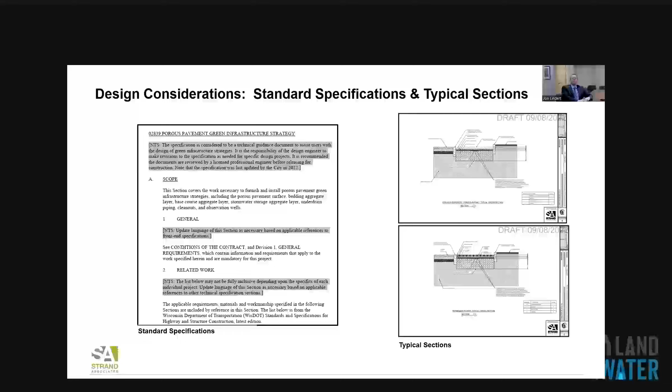From a stormwater quality standpoint, permeable pavement, I think we all kind of look to the DNR technical standard, which has 100% treatment of stormwater that infiltrates, and TSS and TP treatment numbers of 65 and 35%. We also looked at some other studies that were out there to get a feel for what others were saying and doing, that we list in the guide. Also, what came along with that was standard specifications that users could use for permeable pavement, as well as typical sections for consistency's sake on city type projects.

And as always, there's usage considerations and maintenance on permeable pavement, making sure that the pavement's vacuumed. What do you do with the snow, plowing pavers, and then some of the other concerns that the city had with some of these technologies are listed. And then you saw in some of those tables above, ADTs and ESALs and appropriateness for that.

And now I'm going to get into the non-permeable pavement green infrastructure, and how that again might be fit in the right of way. We'll look at DGI priority. We'll look at some of the types of bioretention, types of DGI, and some of these are the usuals that are out there. But again, it's fitting those into a right of way of some sort, not necessarily out on the watershed or outside the right of way. We'll look at a system comparison and some Madison design requirements and some design guidance documents that are out there for these as well. And then some decision-making flow charts that helped kind of pull this all together.

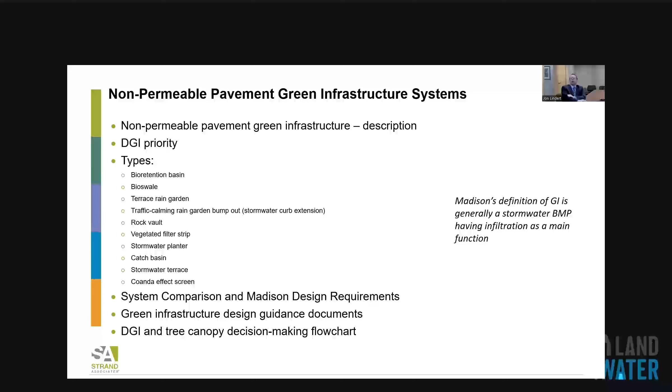One thing to note is Madison's definition of GI is generally a stormwater BMP having infiltration as a main function. So you don't see wet ponds here. You wouldn't probably anyway, since it's in the right of way. But we tried to focus on those, other than a couple in here, catch basin and Coanda effect screen, where if it just didn't make sense for anything infiltration-wise, they wanted that in sort of the matrix of BMPs.

The underlying infiltration potential at the surface or within 5 feet of surface, looking at some of the different infiltration rates that are out there to determine the priority, location in relation to that wellhead protection zone, and really some criteria there, location relative to winter salt routes, location relative to existing flooding during 100-year event, and then really terrace area available for DGI. The less terrace you have, the less things you can do to some extent.

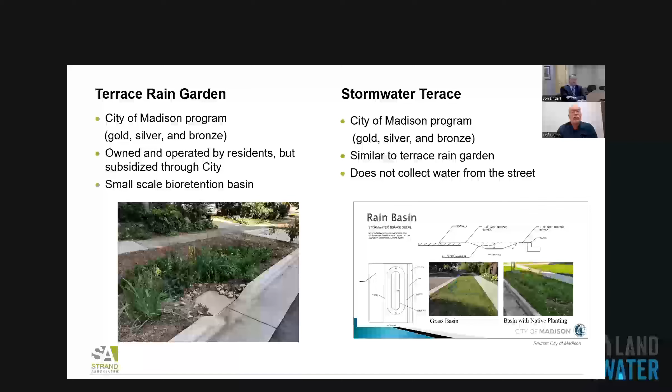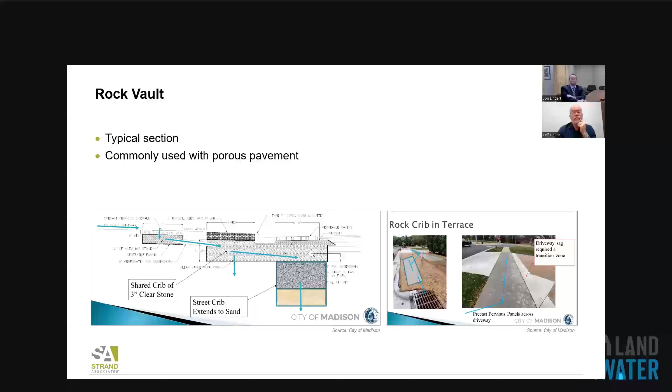Rock Vault, this is City of Madison specific, again, that Phil's been piloting at a number of projects. Again, trying to get something that you can do in the right of way. In this case, trying to get infiltration and then excavation down to a sand layer there, as you can see on the bottom left. Vegetated filter strips, another one out there, taking flow off the edge of a street. Stormwater planters, obviously these can be put in, and a fair number of these are out there. Small bioretention basin, kind of like a suspended pavement system without the suspended pavement to some extent.

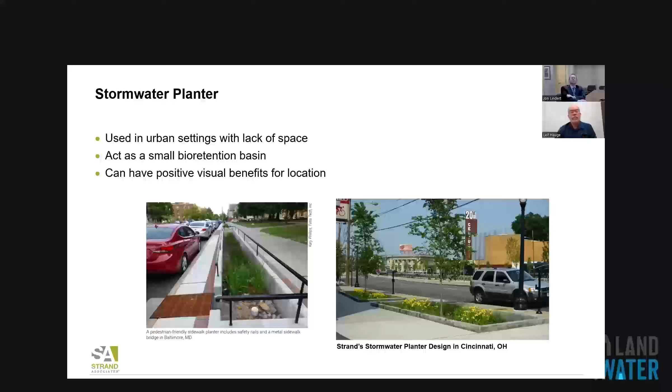And the catch basin and the Coanda screen. Everybody knows what catch basins are. If that's the only option, they are effective if you regularly clean them. And then the Coanda screen, the city's done a number of these. These would typically be at an outfall, maybe downstream from a right of way. We've done one recently with the city out on the Beltline. And they're pretty effective, but again, you need to clean them. And there's some issues with vertical drop in order to institute one.

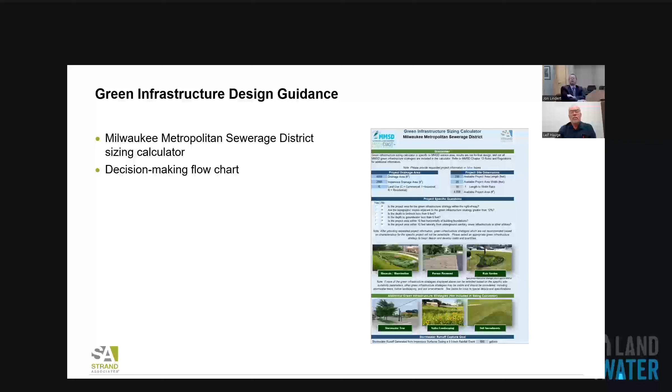Another thing that we referenced within the report is a calculator that we actually put together for Milwaukee Metropolitan Sewerage District that's available on their website. That is on the right there. An array of the different BMPs, it helps you do some initial sizing, built off of some of the calculators in the DNR tech standard. It's been helpful for some users.

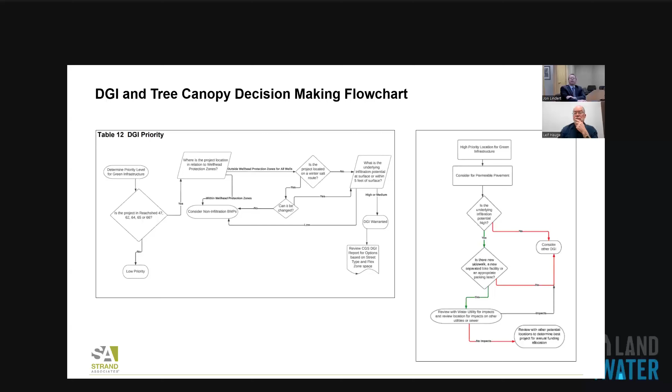So since this guide came out, have any streets been redeveloped and the guide been implemented? And if so, how did the implementation go? Yeah, I'm not sure if any City of Madison people are on here. I know they're using it to help guide their processes. I don't know if they have started from scratch on a project with this.

Since then, I haven't been involved in that step, but I know they're using it for sure to get started on new projects. I don't know any specifics at this point.

With the suspended pavement systems that you were describing, one thing that occurred to me is that when trees go into terraces, after 20, 30, 40 years they heave the pavement around them up, or the roots grow and they buckle the pavement. It seems like putting one of these systems in might reduce the likelihood of that happening.

Yeah, and they have grates over the top of them. I think if you really needed to, as they grow, you could cut back the grate or take the grate out, depending on what you needed to do. So yeah, the heaving issue is really sort of taken away with this a little bit, or a lot of it.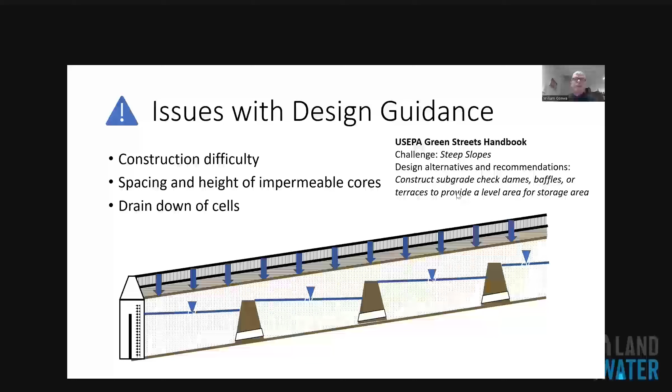You're going to be having to place some material, change what type of material you're placing, change back and forth between the types of materials. How do you drain down those cells? Okay, so you're going to put in little drain tubes through those cells. How big do those cells need to be? Just some major problems. So Wauwatosa came to me and asked if I would be able to help them out, and they were looking at doing a summer alley paving project, and this was February, so there wasn't a heck of a lot of lead time on this. And I said, sure.

So Wauwatosa's design process was kind of a mixture of Autodesk storm and sanitary modeling. They go back and forth, and they use EPA SWMM, and basically it was really clunky, and they had very little confidence in the results of their designs. And there's the EPA SWMM modeling: what depth-storage relationship should they have for that subgrade storage area? What depth-discharge relationship? How much porosity is in that stone? What's the hydraulic conductivity? Just all sorts of questions.

So they came to me, and the first thing we did was a materials investigation. So there's certain types of stone that are used for the subgrade. And the question is, what's the actual horizontal hydraulic conductivity of such stone? You can't just do a vertical hydraulic conductivity test. So we decided to build a model of the alley subgrade. And you can see that on the left. There it is.

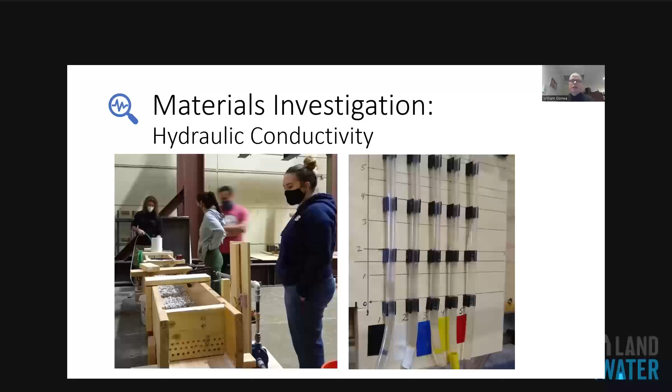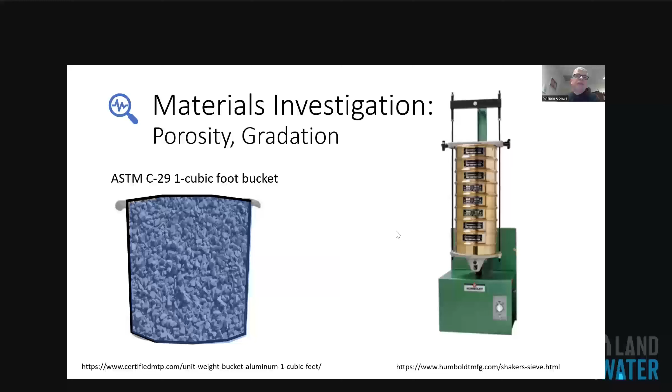Then we also needed to determine the porosity and gradation. What we did was we just took a standard 1 cubic foot bucket and we filled it up with stone, and then we measured the amount of water in it. And then we also did some sieve analysis and shook it up and determined the sieve analysis, so we got our material properties. And here's basically what we had, looking at the hydraulic conductivity in inches per second.

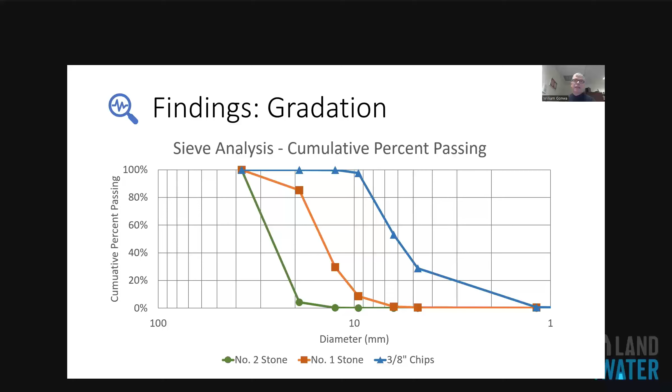And porosity was nice. So we found that the porosity was pretty consistent, somewhere around 0.4, 0.42, ranging up to 0.51, much smaller range than the published range. So it gave us much better numbers to use in our design. We also did the sieve analysis and our cumulative percent passing, and we found in all of these there's very little fines in these stones, which is exactly what we were hoping.

Now, the design tool approach that we developed was kind of this mixture of a hydraulic model and a hydrologic model. And Wauwatosa wanted this all in an Excel spreadsheet because their design engineers were familiar with Excel. They could use Excel. They didn't want to be going back and forth between different programs. So here's what we created: a hydraulic model to determine the amount of subsurface storage and water table profile at different discharge flow rates, discharging from the practice. That's analogous to using like HEC-RAS to determine flood storage in a channel segment.

And then we had a hydrologic model that actually used storage routing. This is the storage routing that you use for detention basin storage, reservoir storage. Anytime you do any kind of detention storage, you're typically using storage routing. Well, we use storage routing with the storage outflow curves developed by the hydraulic model, and that's analogous to using HEC-HMS to determine flood flow at the outflow of each channel segment. And it's all accomplished in an Excel spreadsheet with much better theoretical justification than seat of the pants estimates.

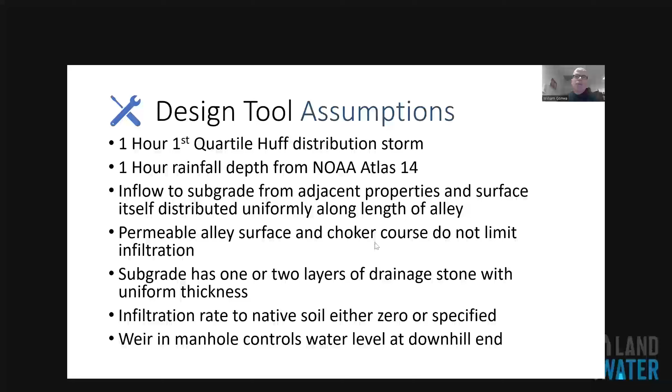The subgrade, we looked at having 1 or 2 layers of drainage stone, each with a uniform thickness, and infiltration rate to native soil either 0, that would be in the case where it was actually lined, or some specified infiltration rate. And then a weir and a downstream manhole controlling the water level at the downhill end. So those were basically the design tool assumptions.

It comes as one single spreadsheet with 4 simple tabs: precipitation runoff, groundwater hydraulics model, step 1, developing the depth, discharge, storage function curve, and then step 2, the hydrograph routing. So let's look at some of these here.

The surface hydrology tab, we just decided to use the simple NRCS type hydrology with it broken down for impervious surface and pervious surface. So pervious, typically in the areas we were looking at in Wauwatosa, the pervious was typically around a 74, and the impervious surfaces were about 98. And then we just split it up 60%, 40% for this particular watershed that we were looking at. Time steps of 0.05 hours, and we're talking about a 3-inch storm in 1 hour.

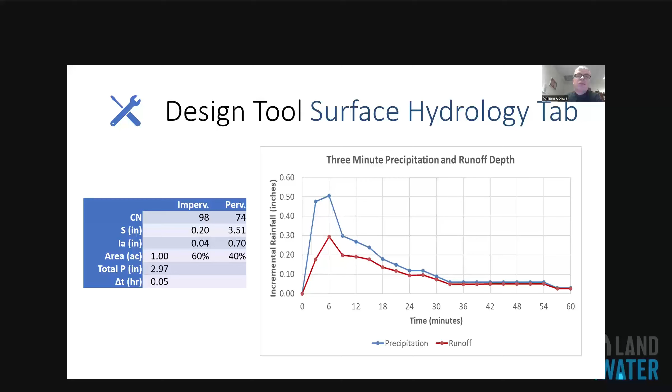So we have the precipitation and runoff for this particular watershed that we were looking at, and you can see we get quite a bit of incremental rainfall. That's like 0.3 inches of runoff in 1/20th of an hour. That would be 3 minutes. So very, very intense amount of runoff coming to this practice.

Now, the groundwater hydraulics tab, now that we know what the permeability is, the hydraulic conductivity, we can actually determine the profile of water flowing through the surface. We're assuming that the flow rate is increasing as you go along the slope of the alley. Here we have an average 3% slope alley. We're putting in this particular case 12 inches of, actually it's 3/8 inch chips at the bottom, overlaid by some amount of number 1 stone above that. A number 1 stone is basically equivalent to a 57 stone.

Our normal depth, this would be if we had the entire flow rate flowing through the alley. We would expect to get 93 inches of depth. All right, but we're not going to get 93 inches of depth. That would be if it were that flow rate going on forever at steady state conditions. Downstream, we were limiting the depth to 20 inches. That's what the weir downstream would control the water level to. So in this particular situation, we have 621 gallons per minute at the outflow. The width of the alley is 14 feet or 168 inches.

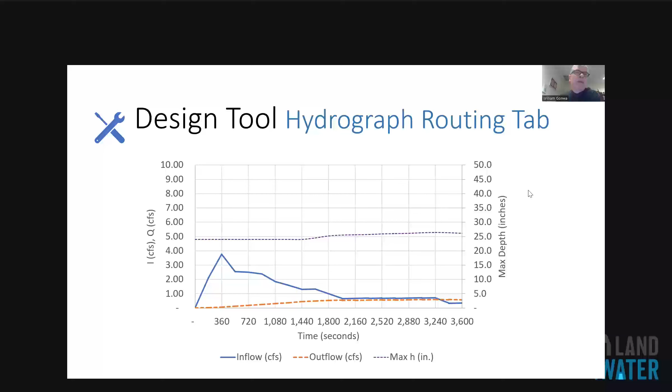So this is really key information, because prior to this, there was really no way to quantify this. We'd just be taking a shot in the dark, trying to figure out how much detention we were getting and what was the peak depth of water in this. So we had to come up with very conservative designs, and the conservative designs may not have provided very much benefit. So here's the testing of the design tool.

This was an actual alley that was set to be reconstructed, and the previous design typical proposed section had a 6-inch pipe underdrain, and most of the storage layer was 24 inches of number 2 stone, and on top of that 8 inches of number 57 stone with 7 inches of pavers. Well, with pavers on top, and then a 7-inch concrete border. So that was the previous design that Wauwatosa was looking to improve. So we did our testing.

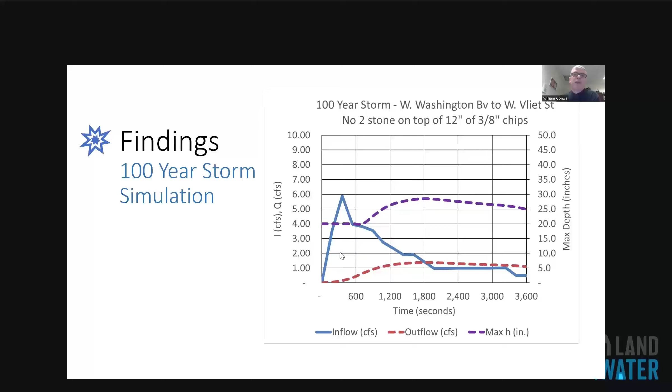This 1,800 second delay meant all the regular pavement, the peak of that storm already went through, and now the storm sewers have capacity for this additional water. So here for our 100-year design storm occurrence interval, we have a peak attenuation ratio ranging from 4 to 9, and peak delays running from 24 to 54 minutes, which provides tremendous benefits for water quantity management.

Now, permeable pavements also enjoy some amount of water quality benefits, but we did not quantify that. So key findings from this is, when we have steep alleys or steep pavements, and this can be done in an alley, a street, a parking lot, anywhere you're getting one-dimensional flow, basically, there's no need for an underdrain. We had a 9-hour drain down time. Well, the goal is 72 hours. We were draining it down carefully.

A 2-layer design with the smaller stone on the bottom and the larger stone on the top. Now that turns design guidance upside down. Typically, you're putting the larger stone on the bottom and the smaller stone on top. But how would you design a detention basin? You never put the low flow orifice at the top. You put the low flow orifice at the bottom, and then a bigger capacity up higher and higher.

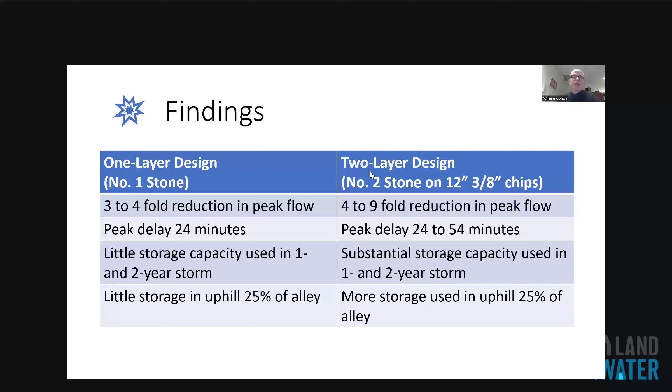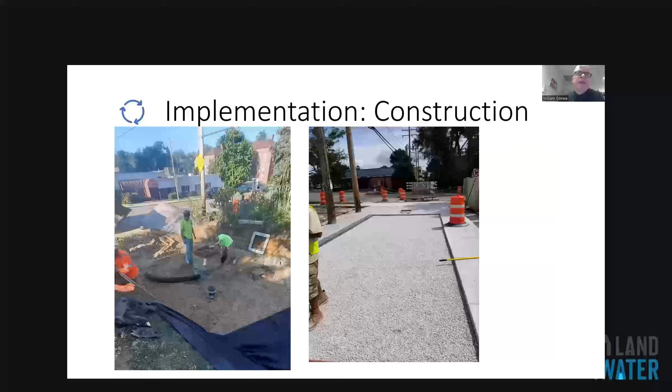And there they are working on the catch basin at the downstream end of the alley, and laying pavers, standard paver laying. And at the end, they now have 25 green alleys installed with 80,000 square feet of pavement removed and almost 1 million gallons of water stored. And that's how far they've gotten so far.

And with that, I'd entertain questions.

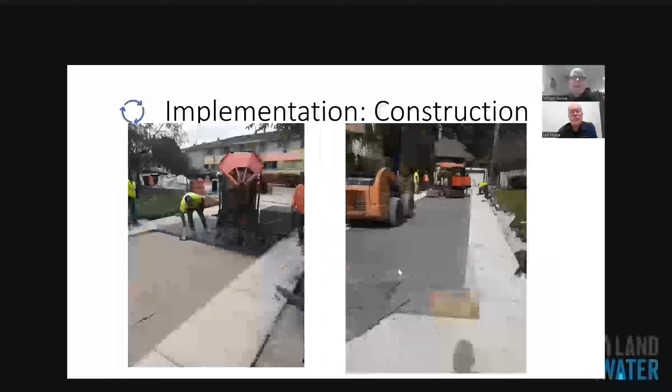Oh, well, I'm just looking at the standard design for Wauwatosa. Here's their implementation and design and construction. I'm just looking back to what Wauwatosa had before. So their choker course was 8 inches of number 57 stone is what they used.

Okay. You mentioned that horizontal and vertical conductivity were different, and I know that in natural settings, due to layering of soil or deposition over time, they can be quite a bit different. But why would they be different in this case, where I think the composition is uniform either way? It's different even if you have uniform material.

If you measure horizontal hydraulic conductivity in the same material that you measure vertical hydraulic conductivity, you are going to get different numbers. In fact, the hydraulic conductivity changes with the slope of the alley somewhat. If we were to take our flume and change it from a 2% slope to a 4% slope, we would get a different hydraulic conductivity. Okay.

Question, could you describe the liner that Wauwatosa used? Is it an impervious liner, or would it potentially allow some infiltration? I think I saw in your diagram it says EPDM. Yeah, that's all I know is that it's an EPDM liner. They do that when they're close to structures, or if they have contamination, I think. But if they're close to structures, they will line it to avoid having water exfiltrate underneath structures.